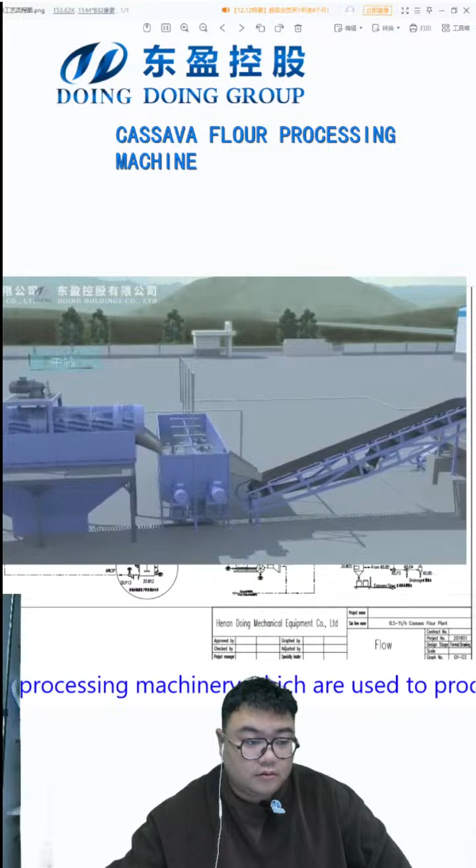Each equipment one by one.

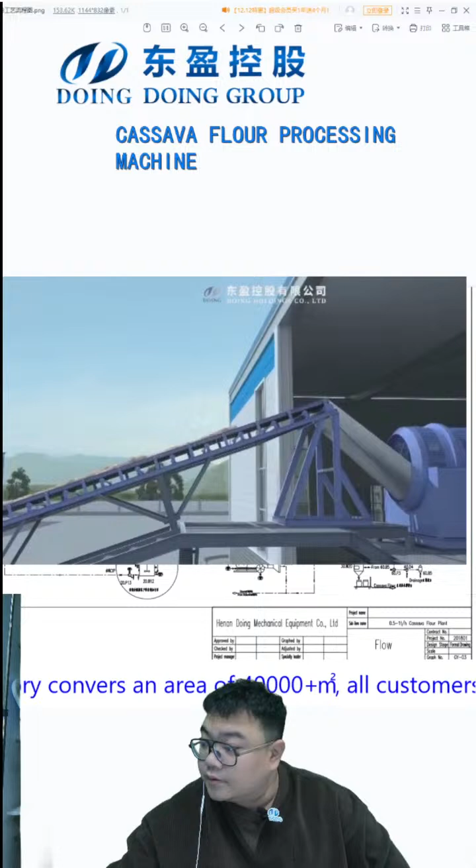First we take the forklift to take all the cassava into the hopper, and the shaking will shake the cassava separately to the belt conveyor, and the belt conveyor will take the cassava to the next step, the dry sieve, because after we harvest the cassava, it will bring some grass or rock.

This step takes these things down, and then it goes directly to the paddle washer to move the soil and the other dust out. And we can see here the paddles shaking and pushing the cassava to the next step, and the water is different with the cassava flow.

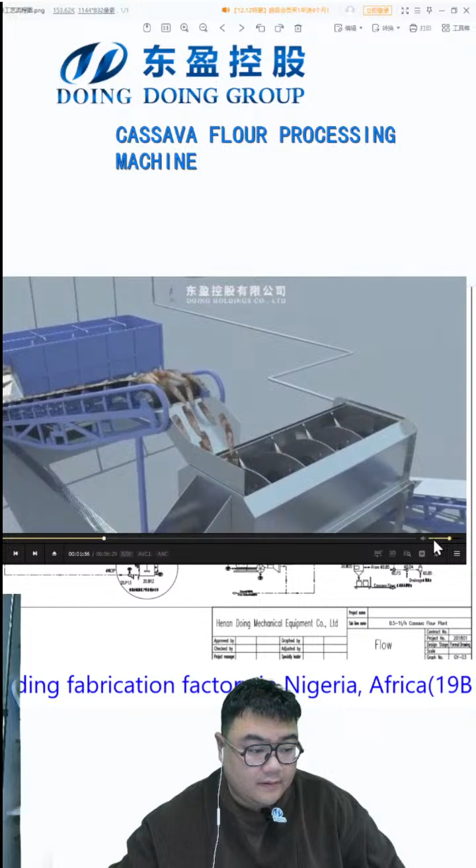For the cassava, it will wash it very clean, and then go to the peeling machine. The peeling machine is very important for the cassava flour. Once you take all the inner skin and outer skins out, the quality of the cassava flour will be very good.

And then after the peeling, the cassava will go to the cutting machines to break into small pieces, easy for the rasper. And then we use a pump to pump all the cassava to the desanders, because sometimes the soil is very thick. We need to move the soils out and make the quality better for the cassava flour.

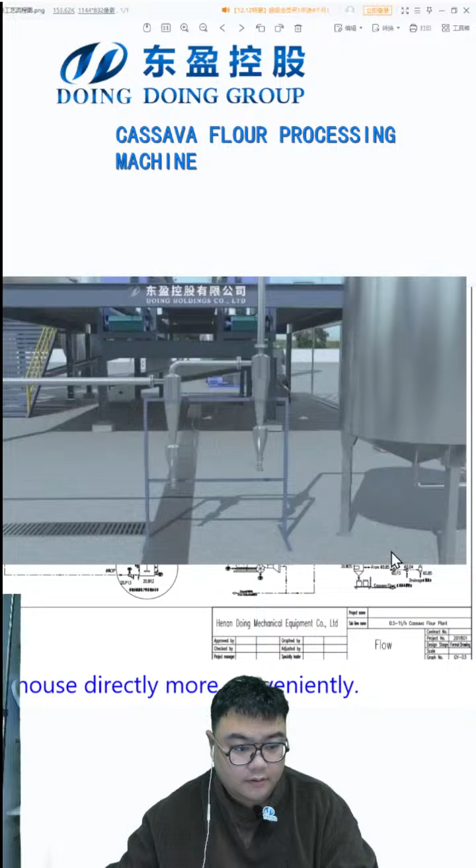And you can see in the tank there is a stirrer. It keeps stirring, so it will not make any harm to the process. And then we use a pump to push all the cassava to the plate filter, and then to push the water out.

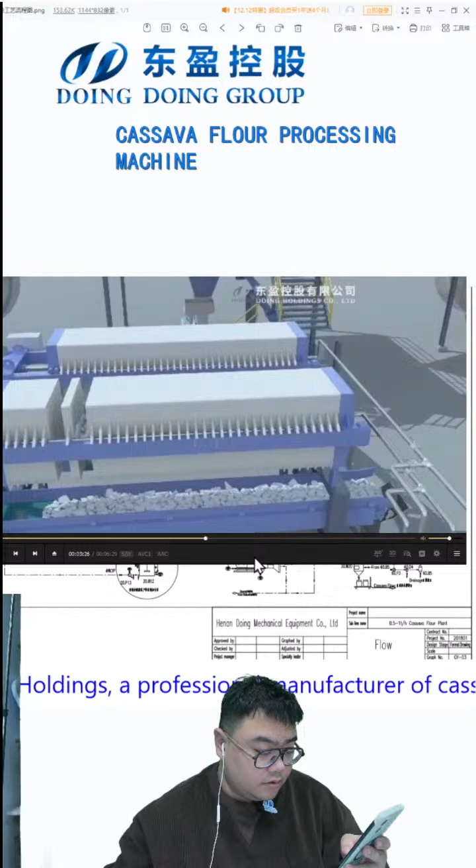The moisture for this one will go to around 42 to 45%, and then we go to a breaker, because after the plate filter the cassava will be stuck together. We just need to break it and go to the flash dryer.

Here's the heat exchanger. The hot air will go from here through all the pipe, and the wind speed is nearly 120 meters. You can see on the video it's very slow, but in actual working, the whole drying time is like 2 or 3 seconds. It's all finished. Then it goes to the cyclone, and downstairs to the shaking sieve.

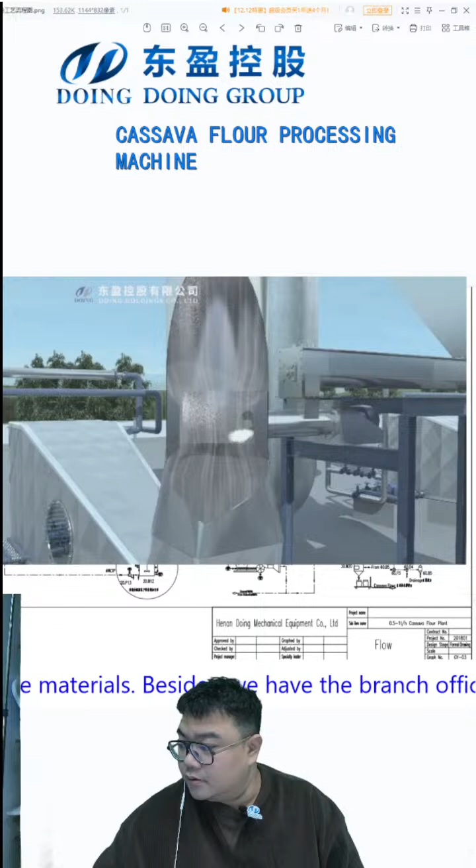For the cassava flour, we use 2 stages of drying sections, because the moisture is higher than usual, because the fiber is not taken out. So we need an extra flash dryer to make it drier, to about 14% moisture, easy for storage. And then it goes to the cyclone and to the sieving.

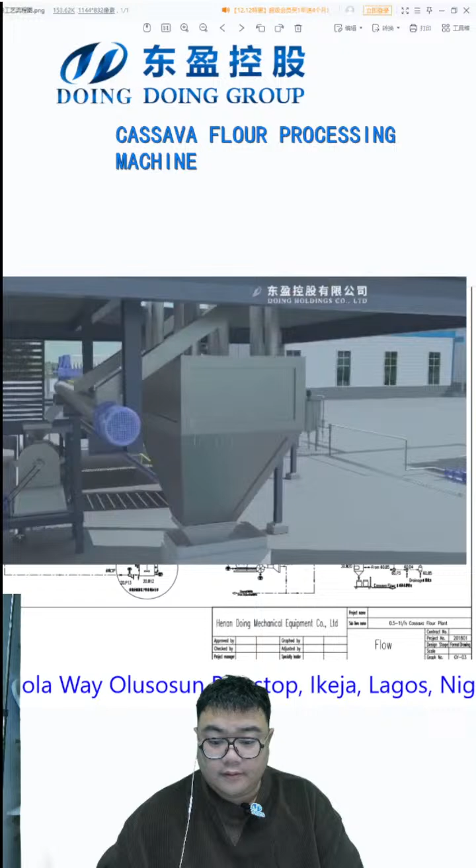After the sieving, we have the semi-automatic packaging machines. The only thing we need to do is put the bag on and do the settings. It's easier to do the job. And once we do the sieving, the bigger particles will go back to the milling machines to make them finer and be packed again.

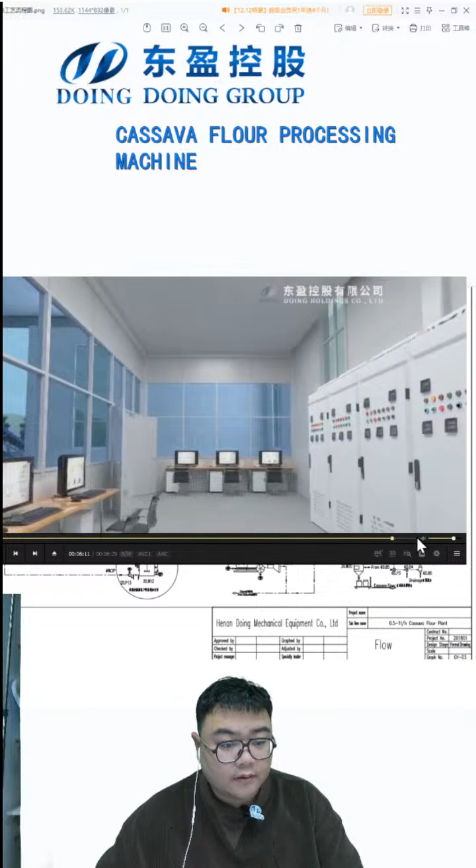And you can see the pipe here. And this is the PLC control room. You can see here the computer which can control the whole process, and it's easier to control and to stop all the machines immediately once we have a problem.

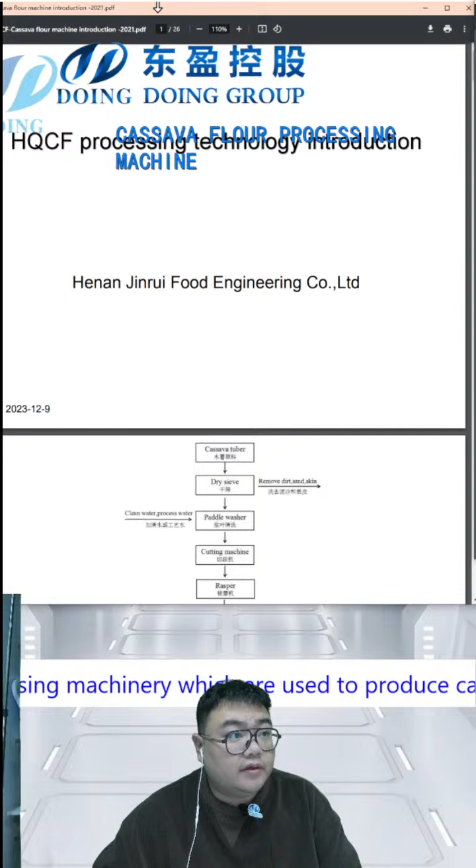Okay, we already saw the videos, so let's begin to see all the things. Firstly is this. We're currently going from here. Let's begin from here. Wait a moment.

Let's begin with the flowchart. Firstly, we need the cassava tubers, and put them into the dry sieve to remove the dirt and some of the skins, because we both know cassava has two skins. One is the thicker skin, one is the inner skin.

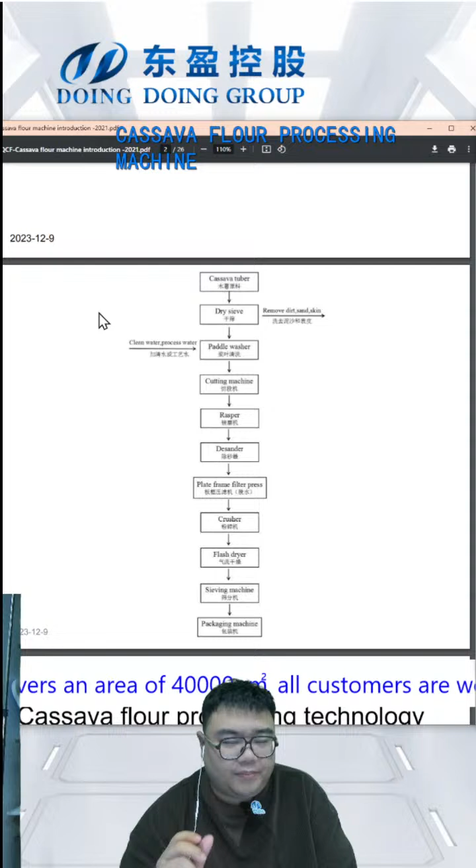For the dry sieve, because we use rollers on the outside of the steel, it will remove part of the skins. So definitely the dry sieve will take out some of the skins, but not all of them. So the next step is the paddle washer.

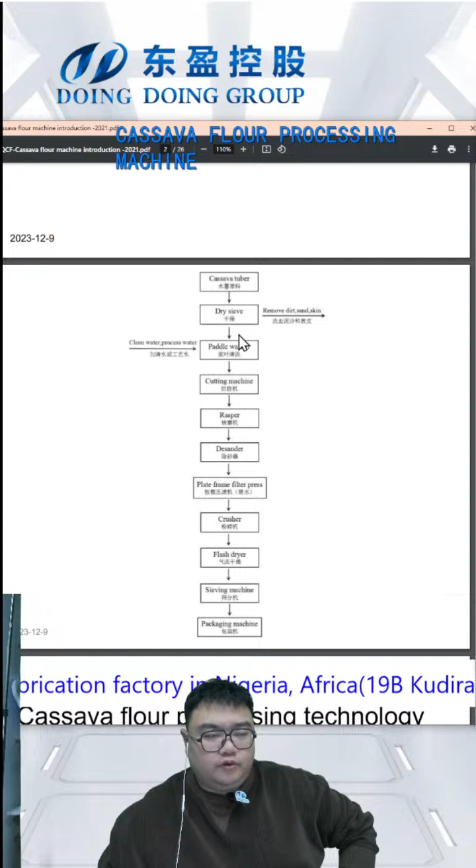We need to add clean water or some of the process water back here to do the cleaning, because when using the paddle washers, some of the water can be recycled, so we can recycle the washing water again, so it does not need too much clean water to do the process.

Second is cutting machines. Because the cassava is too big, and some is this long, we must cut it into small pieces before the machines. Here is before we use the raspers.

Now we suggest using mill machines, because the raspers are more often used in the cassava starch production line. With the raspers, you can destroy as many cells as possible to take the starch out. But cassava flour needs a step to press the water out. If we break too much, the starch will be lost in the plate frame filter process. So here we suggest using a hammer mill, or if the capacity is more, a grating is enough.

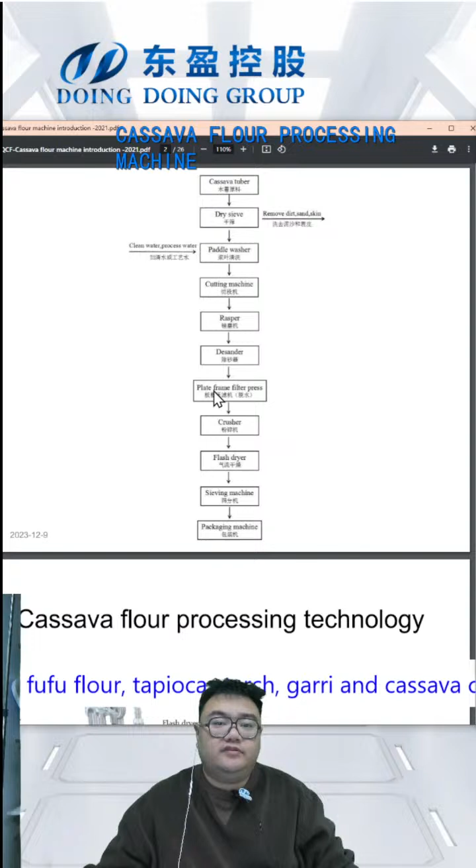After that, it goes to the desander, and there is a pipe from the raspers to the plate frame filter press. In this flow chart, I missed one thing: a middle tank here. After the rasper, it will go to a pool, and after the pool, it will go to the middle tank. The plate frame filter press works flow by flow. We fill one plate and change to another plate, and this machine works maybe about 5 to 10 minutes.

Then we need to send the material to the next step, and it's like wave by wave. So we need a middle tank to send the material to the next step. So a middle tank with a stirrer is important in this step.

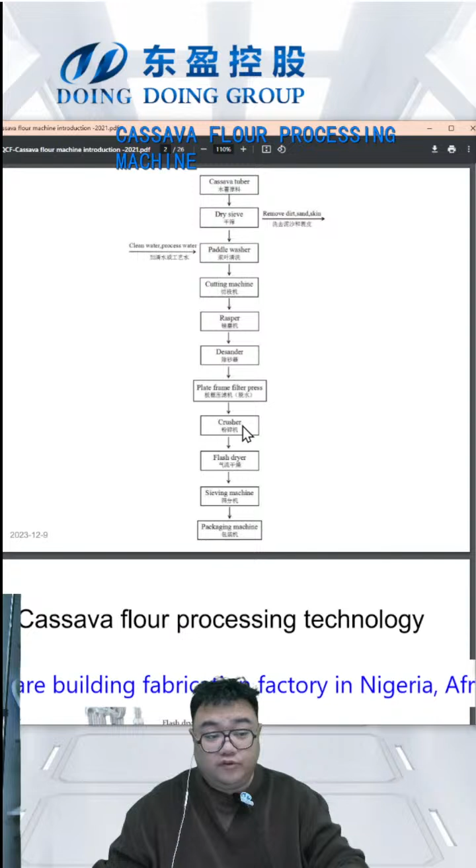Then we go into the crusher, because the filter plate press sticks them together, since we need to press the water out, like squeeze. It will squeeze them together. So we need a crusher or something to break them back to flour, and then put it into the flash dryers to dry it, and then to the sieving machines.

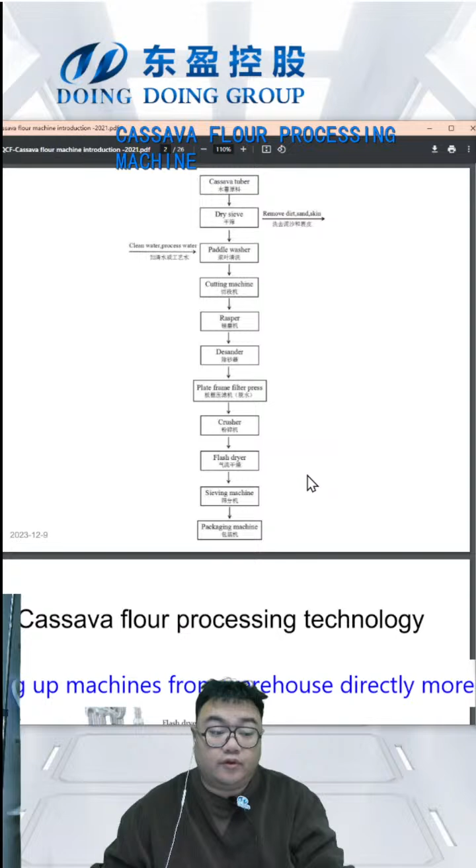Because it's a new step, we suggest putting a fine mill machine here, and before the sieving machines, we mill all the flour. So it will be smoother and finer. Then it goes to the sieving machine to guarantee the quality, and then into the packaging machines. And here is the flow chart and the map.

Here are the feeding hoppers, then a belt conveyor brings it into the dry sieve. After the dry sieve, it automatically goes down to the paddle washer machines, and after the paddle washer machines, we need another belt conveyor to take it up to the cutting machines, which cut it into small pieces, and then into the hammer mill to break it into flour. Then it goes into the middle tank with the stirrer, and after that into the desanders and into the filter press.

And here is another hammer mill. It will break them into flour again, so it's easier to go into the flash dryers. Then the flash dryers and the vacuum machines and so on, and then a fine mill machine, and after the fine mill, to the sifter, and then it can be packaged.

Here we can see the scraper and the belt conveyors. There are usually two kinds of belt conveyors. One is to transport the cassava to the next step when it's not peeled, or after peeled. It's okay, because it's not processed yet. So this kind of belt conveyor is fine.

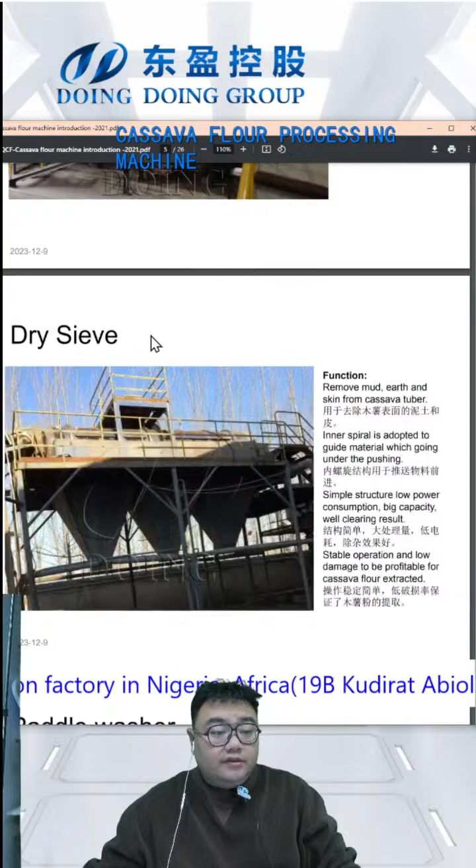So here is the dry sieve. Yes, it removes the mud, earth, and skin from the cassava tubers. And the inner spiral is adopted to guide the material which is going under the pushing. Simple structure, low power consumption, big capacity, and good cleaning result. Stable operation and low damage, profitable for cassava flour extraction.

So it's something like this. You can see here. Here is the address.

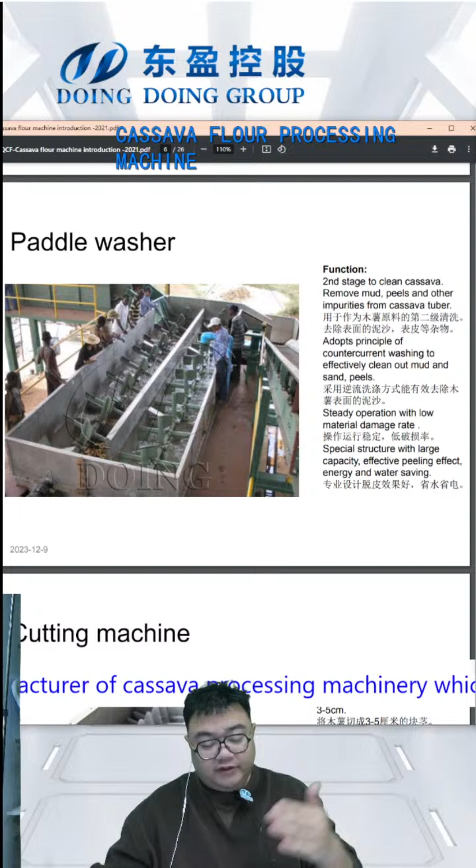It's something like this. Maybe you don't understand, because the water is going this way, and we're using a paddle to push the cassava to go from here, but our water is from the top to the end, so this way is called countercurrent. So it's easier to take the mud and other things out because it's serving one more force. And steady operation with low material damage rate.

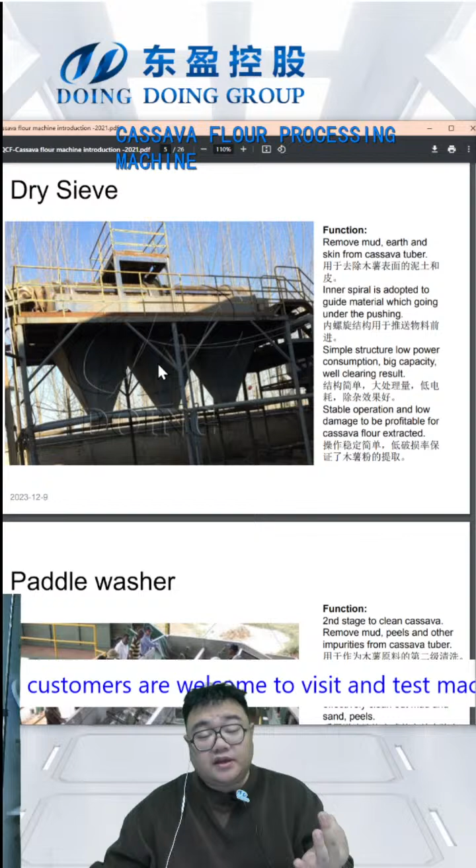Because here we also take out some smaller things like stones, because at this step some bigger stones may stay with the cassava to the next step, but when it goes to the paddle washer, the stone will go down and the cassava will go up, so it's easier to take them out. And special structure with large capacity, effective peeling effect, energy and water saving.

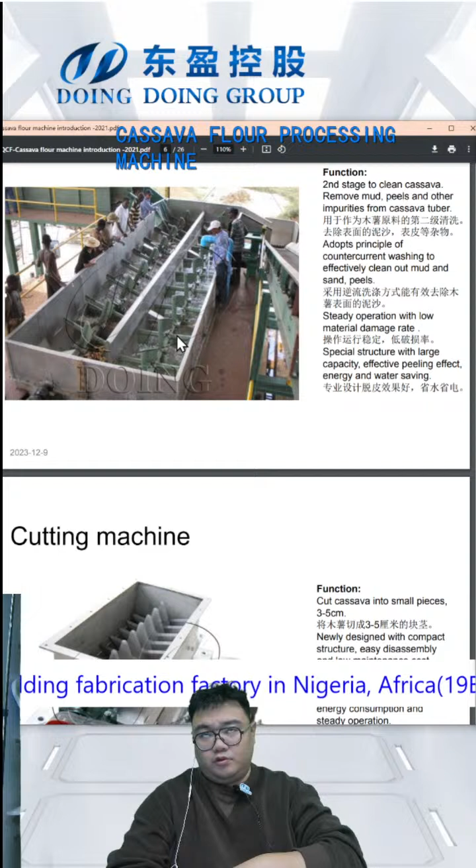So for this kind of peeling machine, capacity is from 1 ton to nearly 5 tons. Maximum is like 5 tons. If more than 5 tons, we need to combine the paddle washers. No, I mean, sorry, it's like 10 tons. The paddle washer is not a big deal. It doesn't have a capacity limit, but usually 10 to 20 tons is all fine. I was thinking about the peeling machines.

So there is a peeling machine after the paddle washers. So it's like this. Let me find one thing here. This one is cassava right here. What?

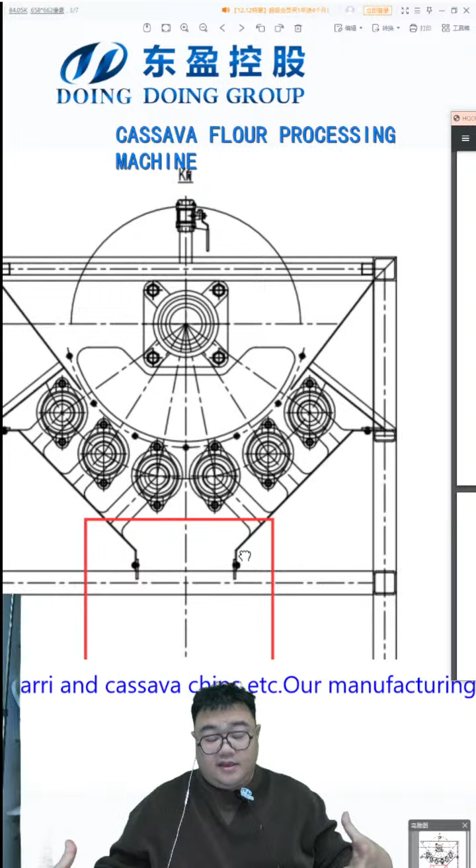When the cassava touches this, and the skin is smashed off, it will go down from here, and you can put something like bags here to take the peel, so you can dry it and break it and make animal feed. So it's another use.

And here is the water pump. We take the water from here to go inside, and here is a way to switch open and close. And you can see the water is going this way, and going outside from it. So because of the sandpaper with the water, it will be more effective to take the peel out. It's pretty good.

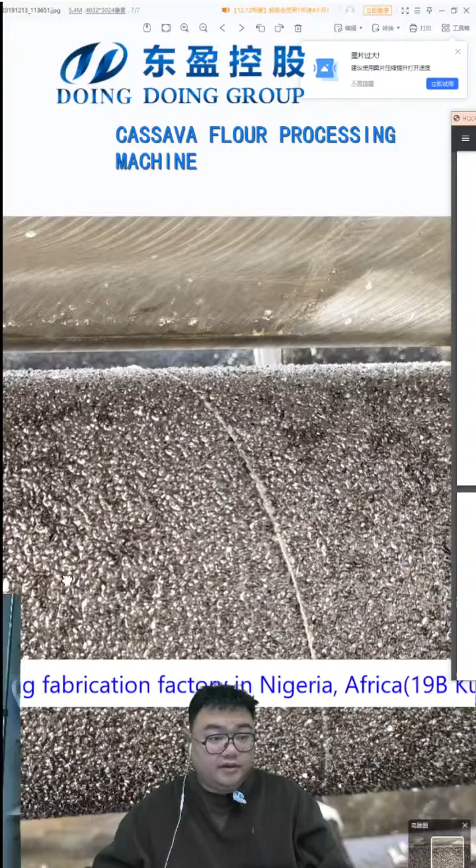So secondly, let me find another map. This is a water sandpaper. You can see it's very rough, so we can definitely take the skins off. Sorry. And here is the sandpaper, and we can go next. Yeah, we can go next.

Here we go to the cutting machines. After the peeling machines, part of them are already peeled, but if we want better quality, we suggest having someone after the peeling machines to check the cassava. If some of the skin is not taken off, we just use a knife to cut that part and throw it back to the peeler again. So after we take all the peel off, we go into the cutting machines and cut the cassava into small pieces like 3 to 5 centimeters.

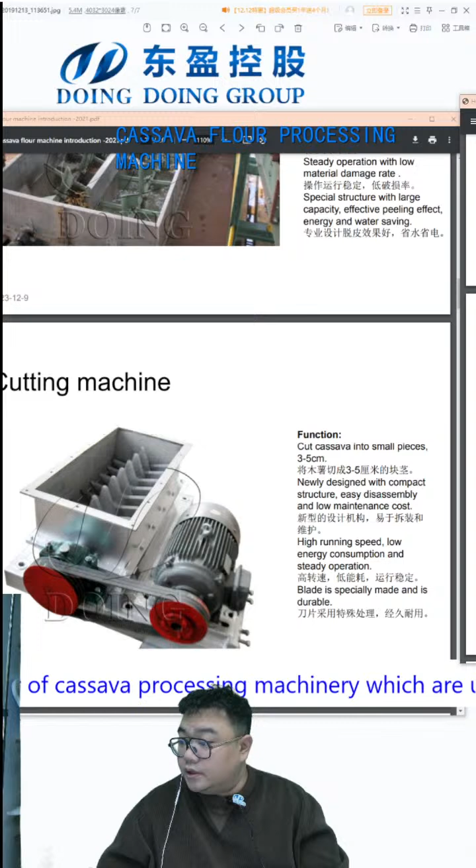It's newly designed with compact structure, easy disassembly, and low maintenance cost. And high running speed, low energy consumption, and steady operation. The blade is specially made and is durable. So let me find another picture for this one. Here. This is the page.

This is the picture of it. You can see here is a big blade inside, and it's called 65Mn, and it's very strong, and it's like a diamond shape, and it will cut all the things into small pieces, cut the cassava into small pieces. And this is the picture for the inner part.

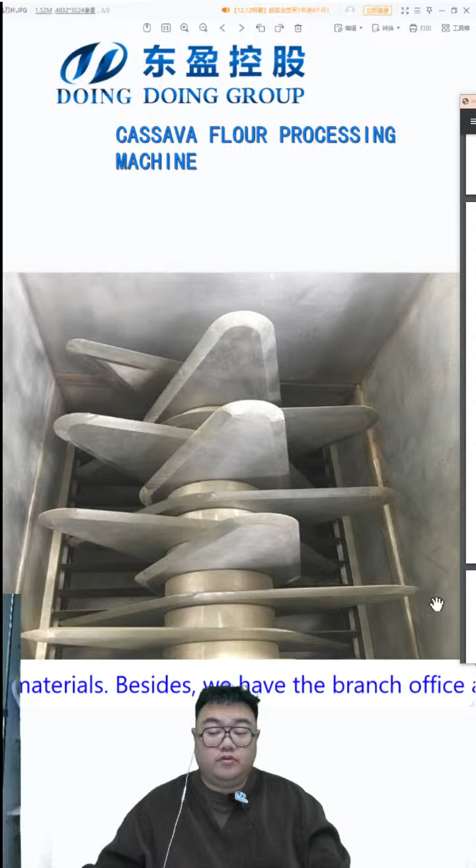Yes, this one. This one is a blade. Inside the blade, you can see it. And when it's more than this, like this big, it will not go down. It will be cut again by the blade. So no need to worry about it, and it will continue going. Okay, let's go to the next step.

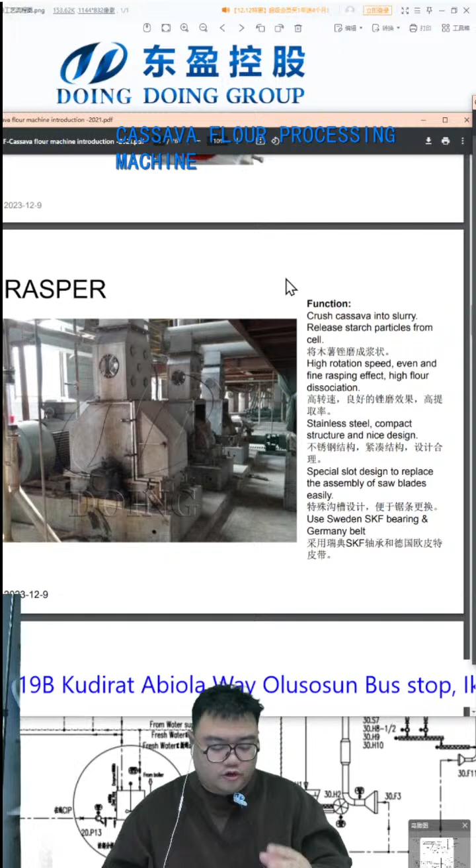Here. After the cutting machines, we go into the rasper, like this. I talked to you before, because the rasper breaks the cell too much, it will bring the starch out too quickly. So my suggestion is using a hammer mill machine to make the cassava flour, and replace the raspers. So let me find a hammer mill machine.

So no need to worry about it, because we do have a second step to do the same thing. This step is only to break it enough to go into the filter plate to take the water out. So for the thickness and all the things, more like the flour, is another duty for the fan mill machine to mill the flour again to that thickness. So no need to worry about the flour things. Okay, let's go to next step.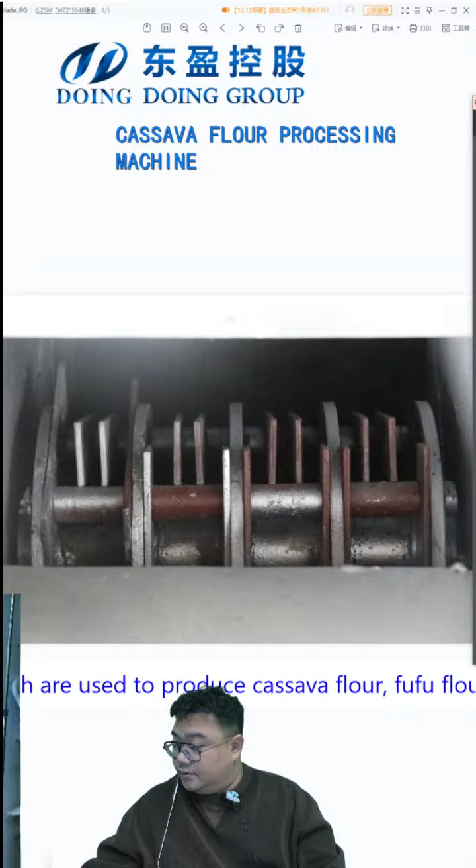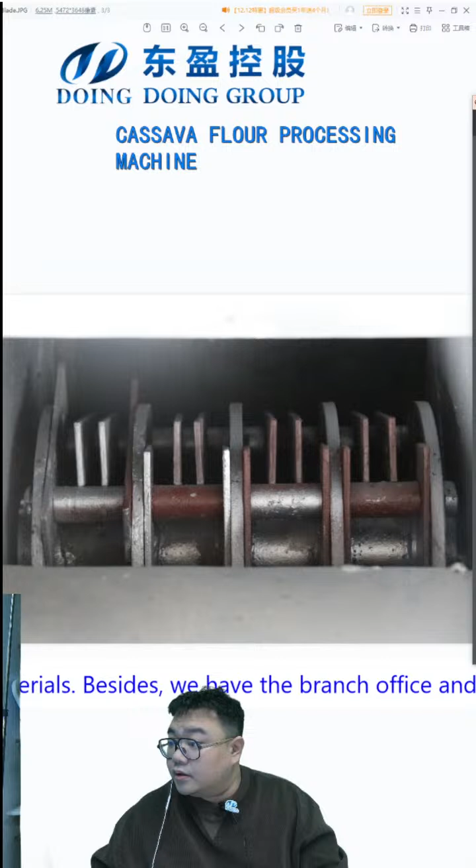To next step. It's more like, it's not like this one. Where is it again? Wait a minute. Let me find one thing. Where is it? Let me open one thing. Yes. Not from here. Yes, from here. Yes, great. We found it.

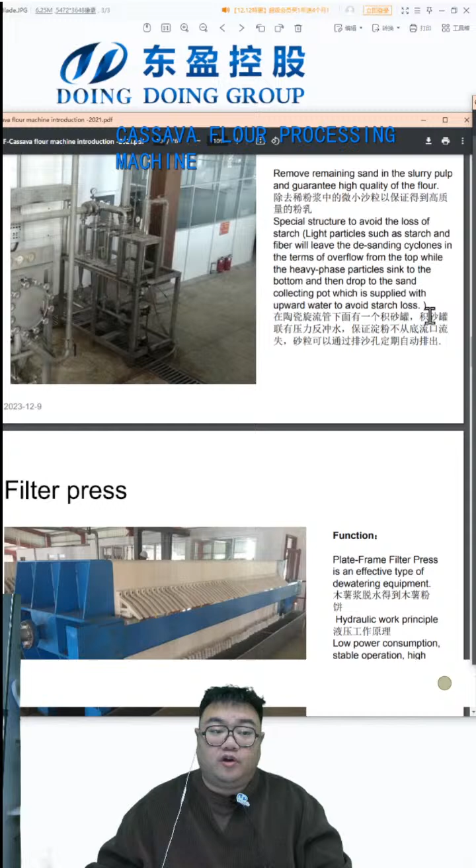So after that, we go to the desander. Remove the remaining sand in the slurry and guarantee high quality of the flour. The special structure avoids the loss of the starch. Light particles such as starch and fiber will leave the desanding cyclones in terms of overflow from the top, while the heavy phase particles sink to the bottom and then drop to the sand collecting pot, which is supplied with upward water to avoid starch loss.

So this is quite simple, and you can see the mapping, the photos in here. Due to the capacity, it will be much bigger. We do see some for the starch. It's like that big, or this big, and this long, nearly 1 meter. So to guarantee the final things.

And then it's going to the filter press. The plate frame filter press is an effective type of dewatering equipment, with hydraulic principles and low power consumption, stable operation, and high starch extraction rate. So for the filter press, you can see here. One plate is 1 by 1. So this is a normal filter press.

So we have another filter press, this one. It's more suitable for much higher quantities. So we bring the air back to this machine. You will see a lot of small pipes down here. They link to the air compressors, and when it's working, the air compressor directly brings the air inside the machine, using both the hydraulic and the air to take the water out.

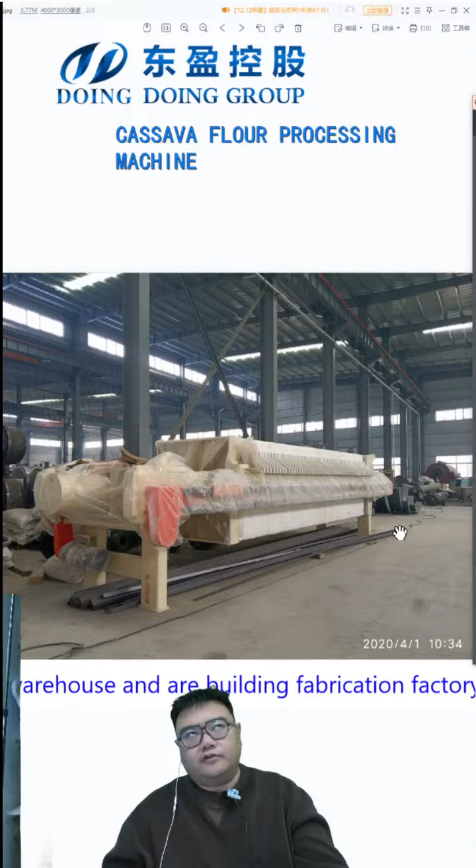So after going through this machine for around 20 minutes, the moisture will decrease to around 39 to 46, something like that. So it will be easier to go to the next step and see the machines. Okay.

And then we can go to the next step.

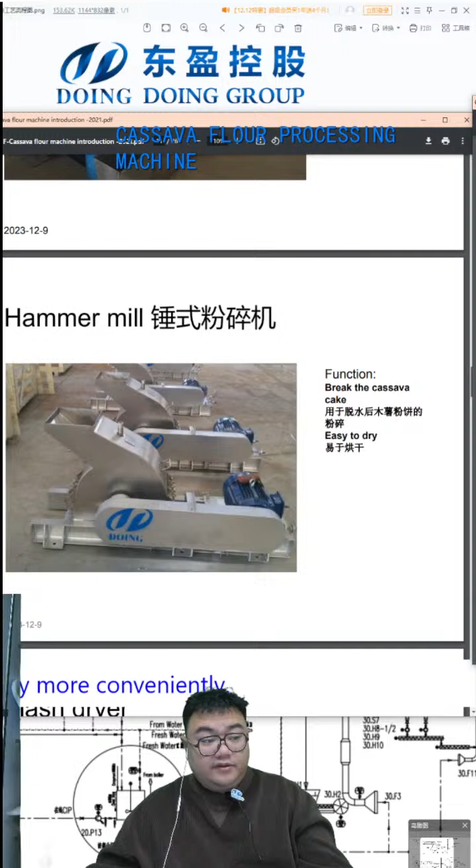I'll go back to this one. After the filter press, this is a hammer mill machine. You can see it, like at the beginning I said to you.

So then we go to the flash dryer. It's impressive that the negative pressure in the whole system works like this, because there are two ways for this pressure system: positive pressure in the whole system and negative pressure in the whole system.

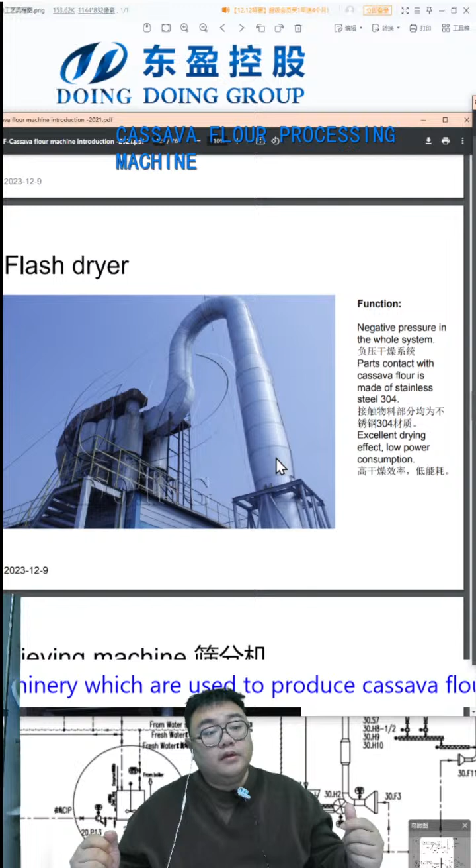The positive is like we take a fan at the top in the beginning and push the air inside, press the air inside. So the air is more inside than outside, so the pressure is higher inside than outside. So the flour, because it's thick, it will go outside because the pressure is higher than outside.

But using a negative pressure in the whole system, we take the fans, exhaust fans, in the back. So we stretch the air from the pipe to make the pressure smaller in the pipe and bigger outside. So the outside air presses the pipe, so no need to worry about the flour going everywhere.

And the parts in contact with the cassava flour are made of stainless steel 304.

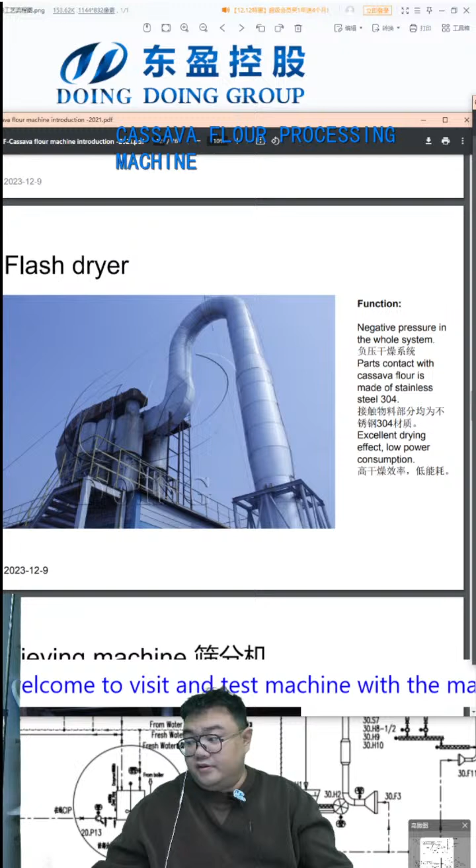You can see after working, it's shaking very hard to help the flour go down, and it will be much better for this.

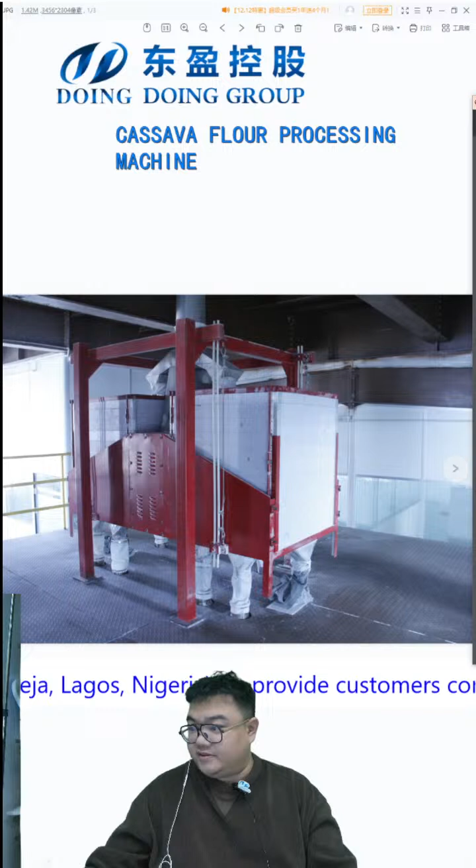And you can see the other pipe here. It's linked here and directly linked to the packaging machines, so you can see here.

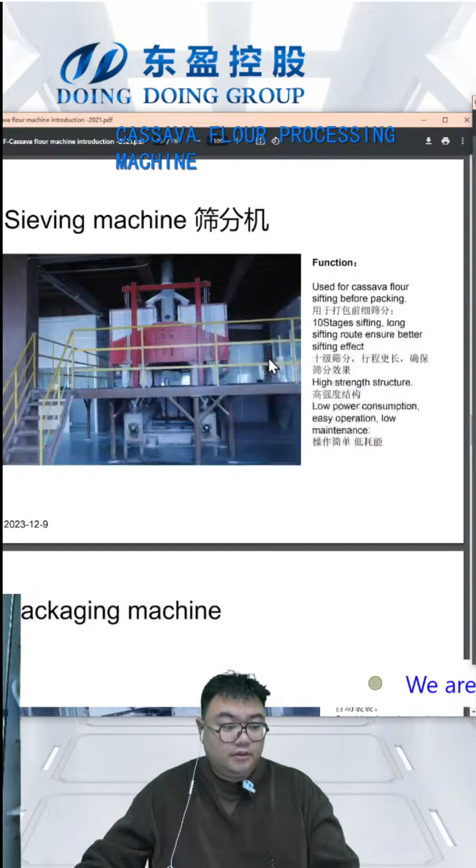It's running stable and easy to operate, monitoring the whole workshop production state. So the PLC looks like this, and it will show each of the temperatures.

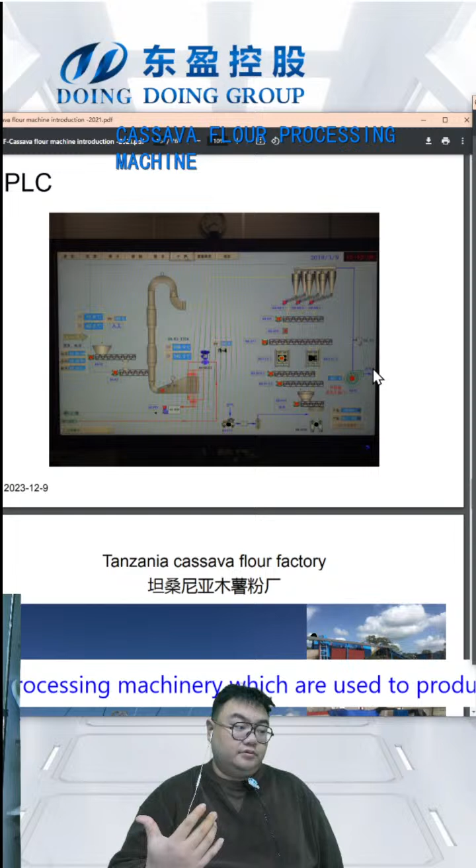If we have enough sensors, we can show all the details on the computer. You can control it directly from the computer to start or stop all the machines. It's very good, making it much easier for the engineer to control the information for all the things.

And here is the Tanzania cassava flour factory. You can see here the details for each of the steps. This is a filter plate press, and this is the sieving, and this is a Chinese potato starch factory in the local area. These are some of the projects we've done before.

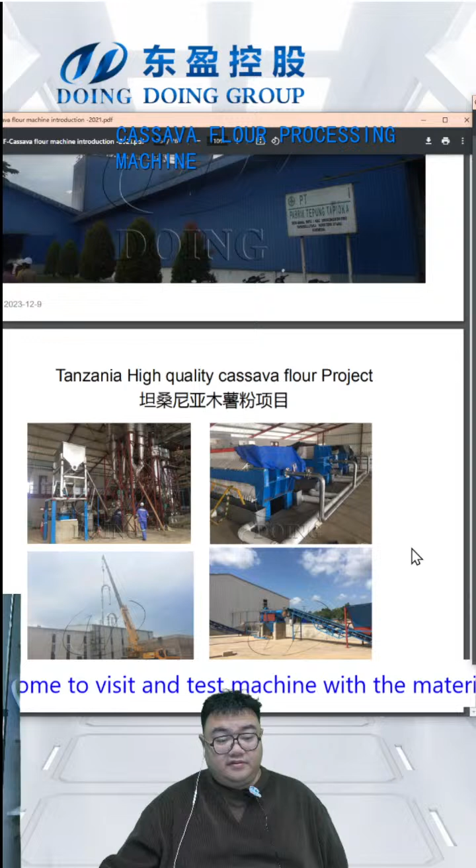This is the most important part for the cassava flour project line, because the pipe for the flash dryer is nearly over 19 to 20 meters high, so we must use something like this to take it inside.

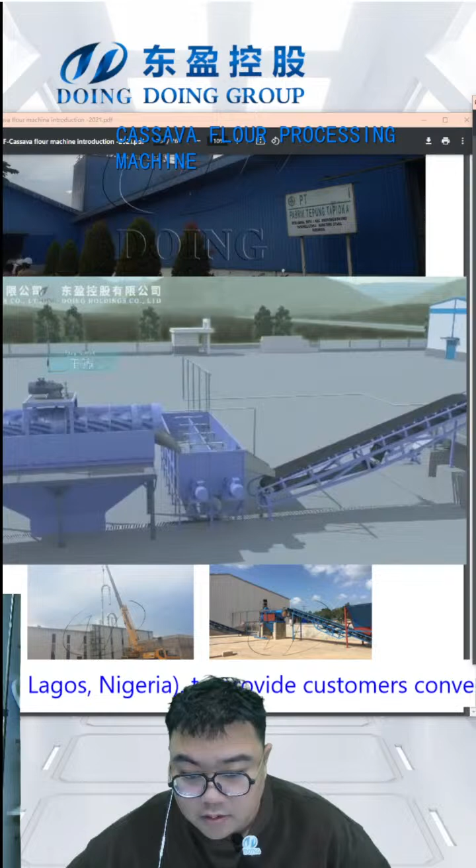Hey, this is Floyd Cui from Doing Holdings. Today, I'll introduce you to the cassava flour production lines. This is the basic equipment for all the machines for cassava flour production, and just to have an overview of all the equipment, and then we'll describe each piece of equipment one by one.

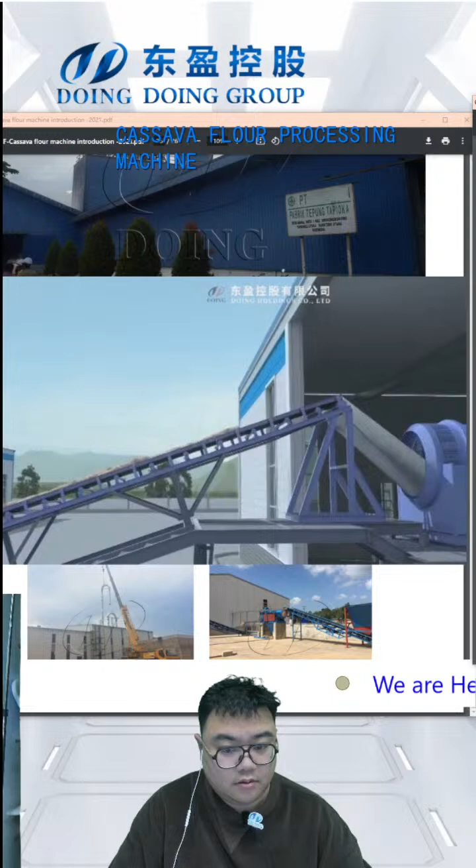First we take the forklift to take all the cassava into the hopper, and the shaker will shake the cassava separately onto the belt conveyor. The belt conveyor takes the cassava to the next step, the dry sieve, because after harvesting the cassava it will bring some grass or rocks. This step removes these things, and then it goes directly to the paddle washer to remove the soil and other dust.

Here we can see the paddles shaking and pushing the cassava to the next step. The water is separated from the cassava. The cassava is washed very clean, and then goes to the peeling machine.

The peeling machine is very important for the cassava flour. Once you take all the inner skin and outer skin out, the quality of the cassava flour will be very good. After peeling, the cassava goes to the cutting machines.

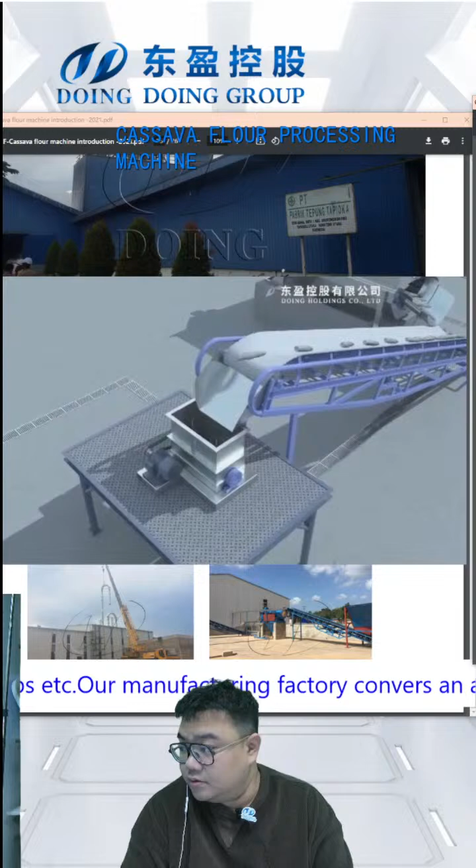The cutting machines break the cassava into small pieces, making it easier for the rasper to process it into starch, making it very thick. Then we use a pump to pump it to the next stage.

It goes to the desanders, because sometimes the soil is very thick. We need to remove the soil to make the quality better for the cassava flour. You can see the tank has a stirrer, which keeps stirring for the cassava flour.

I think in Russia there's more interest in potato starch production lines or something like this.

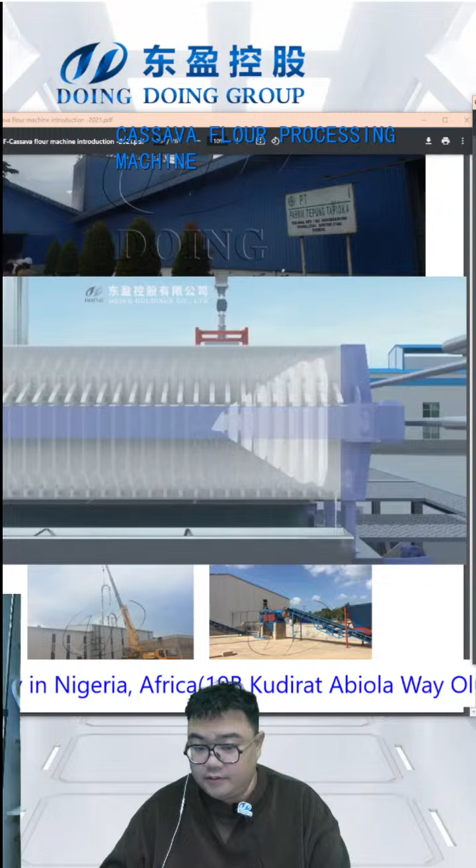This doesn't make anything hard for the process. Then we use a pump to push all the cassava to the plate filter, and then push the water out. The moisture for this stage will go down to 42 to 45%, and then it goes to a breaker, because after the plate filter the cassava will stick together. We just need to break it up and send it to the flash dryer.

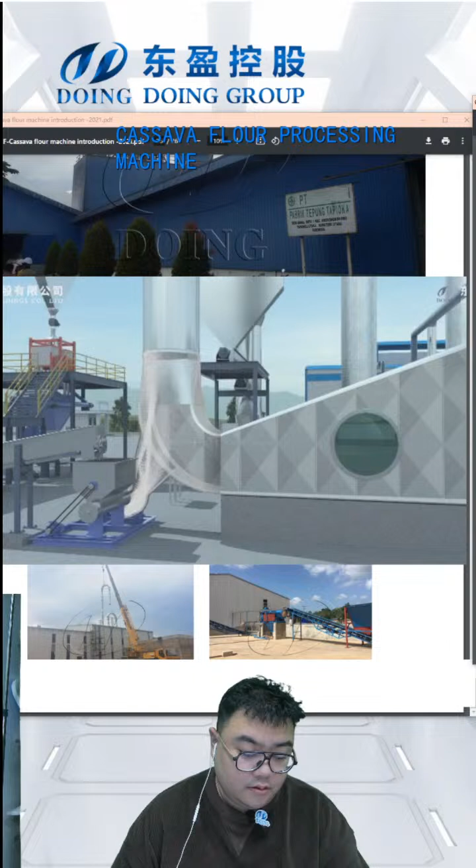Here's the heat exchanger. The hot air goes from here through all the pipes, with a wind speed of nearly 120 meters. So you can see in the video it looks slow, but in actual working conditions, the whole drying process takes only 2 or 3 seconds.

It's all finished, and it goes to the cyclone, then downstairs to the shaker, to the sieve.

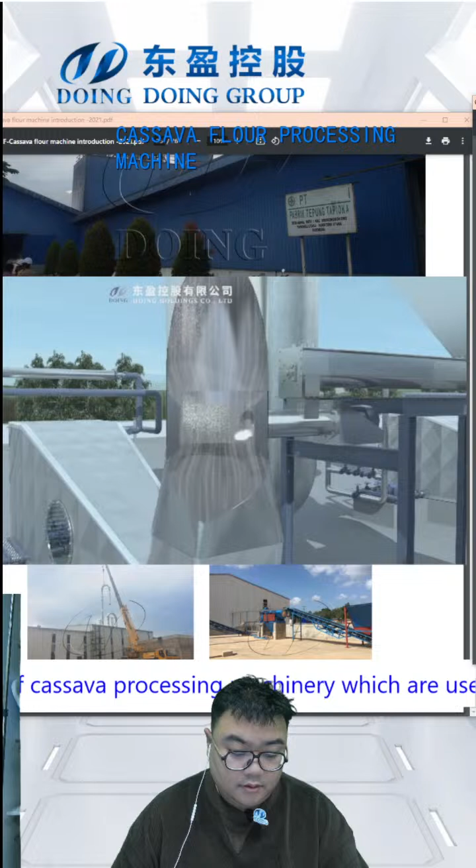For cassava flour, we use 2 stages of drying because the moisture is higher than usual, since the fiber is not taken out. So we need an extra flash dryer to make it drier, down to about 14% moisture, for easy storage. Then it goes to the cyclone and to the sieve.

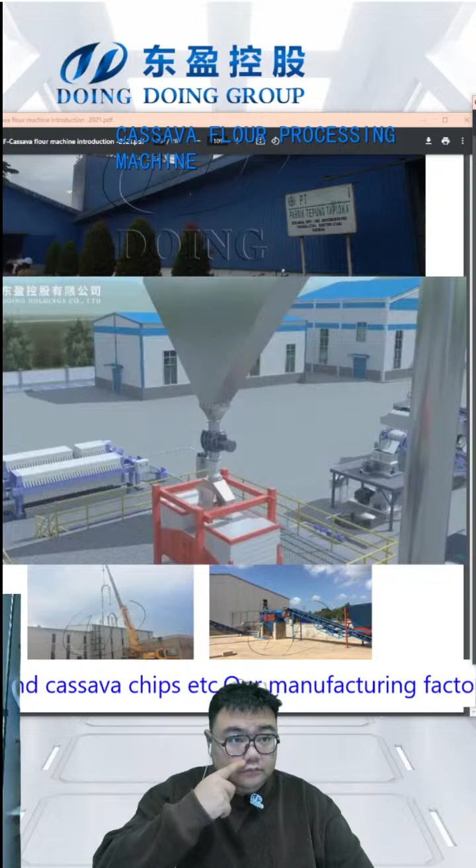After the sieving, we have the semi-automatic packaging machines. The only thing we need to do is put the bag on and do the sewing. It's much easier to do the job this way.

Once we do the sieving, the bigger particles go back to the milling machines to be made finer, and then get packed again.

You can see the pipe here, going back with the plate, and this is the PLC control room. You can see the computer that controls the whole process. It's much easier to control and to stop all the machines immediately if there's a problem.

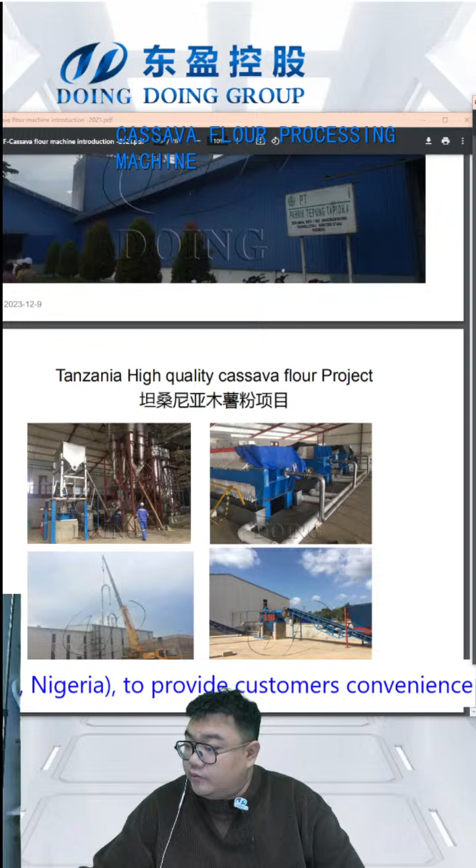So it's like this, I will try to find some pictures for a project we've done before for a cassava flour project, so we can see some of the machines and other things. Let me find it for you, just wait a minute.

It's kind of like this, yes, something bigger, and these are the installation photos. Let's go and check this one, it's a cassava flour project. This is also a cassava flour production line we've completed the installation for, just finished.

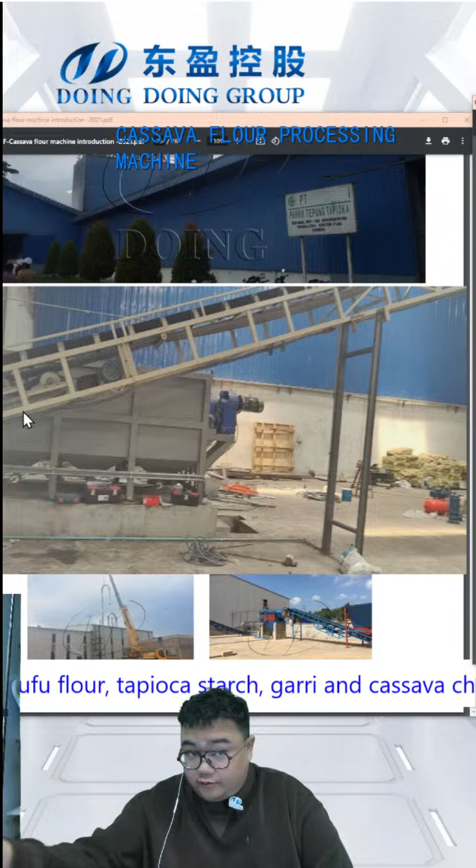We make a cover and cover it. So once the cassava goes into the cutting machines, it will not go outside, because the blade is too strong and it will smash something out if we don't put a cover on it.

Firstly, we put a cover on it, and secondly, it protects so it's not going outside. And here goes down here, there is a conveyor. You can see the conveyor, and here are raspers. Because this project is doing both fufu and cassava production lines, we can find you one of them.

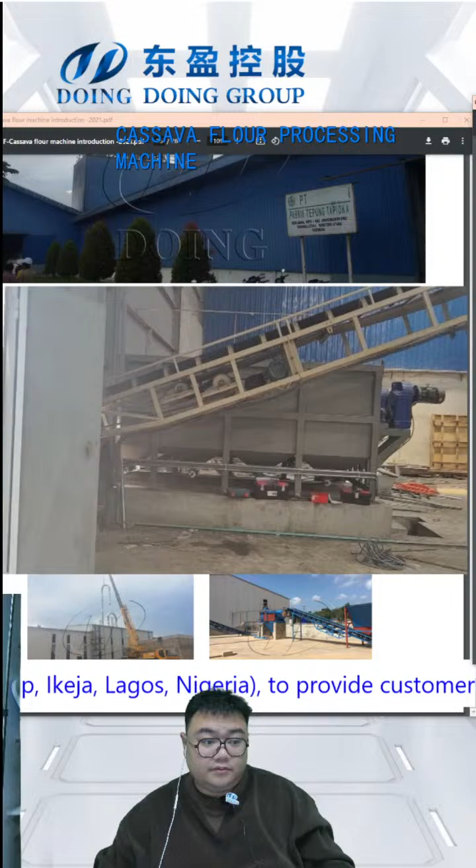Yes, it's here, this one. I've seen it plenty of times. Not here, this one, I've seen this one plenty of times. Because this one is... let me show this one. Okay, you can see here, you can see all the things. Okay, here we go, we can find another one.

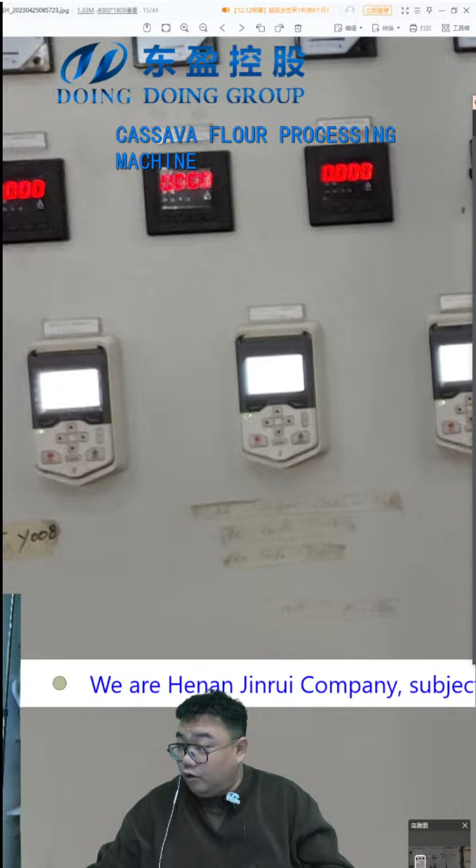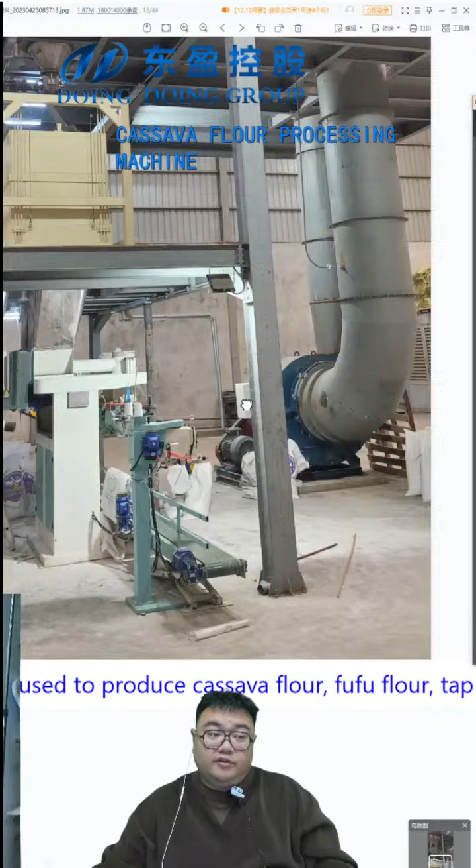So if some of the machines... because this is a very old project, so after now we are already updating. We are just watching the workers do the job, because we need to do a lot of adjustments.

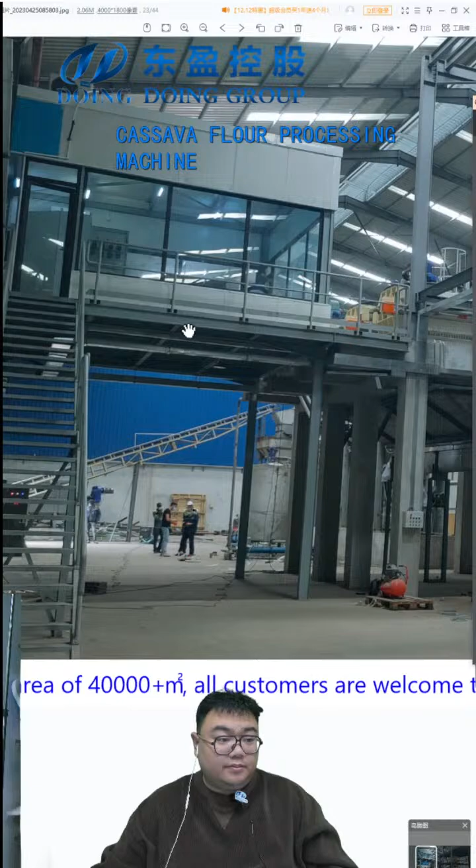Here you can see this is the filter plate press, and here goes upstairs. We can see the computer is down here and controls all the things.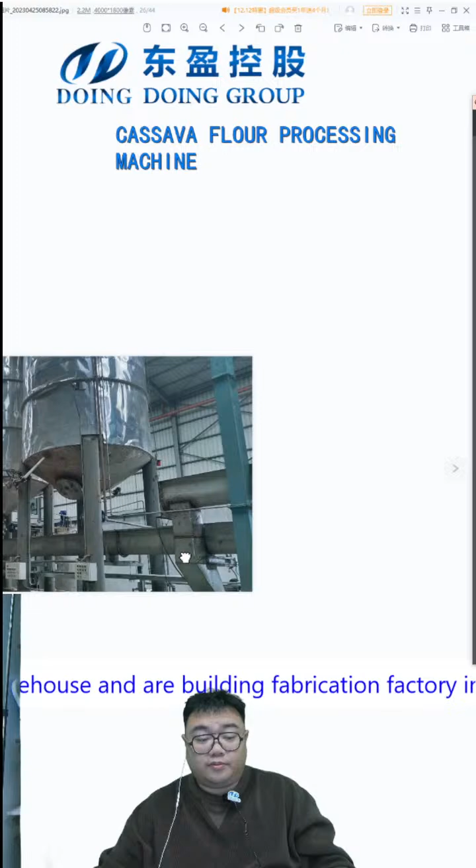And this is also the flash dryer, and it's a screw pump. And it's another... it's something like this, because this full tank is for the fermentation, and we put the fermentation inside of this, and then it can ferment for about 2 or 3 days, and then go downstairs and do the processing again. So it's for the fufu only.

So for the traditional cassava flour, you don't need to do the fermentation. We suggest that after we break it into small pieces, then bring it back here to do the processing.

And here is where we do the installations and the same things. This is the engineer hand, with me, going to do the installations. We stayed in Kinshasa for 3 months and did the whole installation, commissioning, and all things.

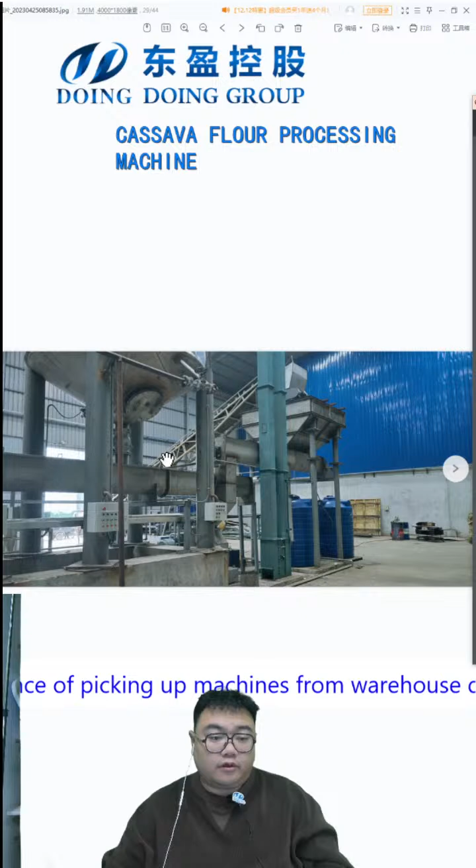And this is a boiler to supply the heat to the flash dryer and then do things. There's some workers adjusting the things. Yes, here it is.

This is just a through pump to adjust the boilers. Because all the machines are made by man, there will be some slight problems, but after we adjust them locally, it will run properly and smoothly. So no need to worry about all things.

And we are taking the plate and taking this paper to each of the plates to guarantee the water will not go out too much.

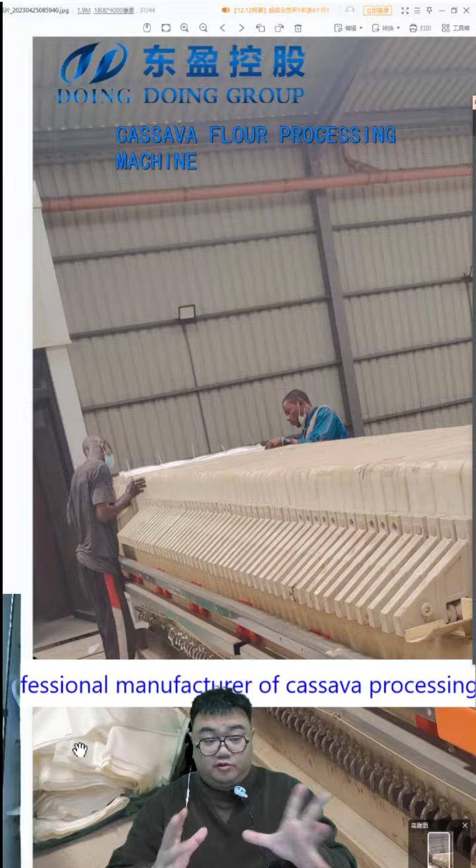Okay, here we go, and we can see this one again. This is the 3D video.

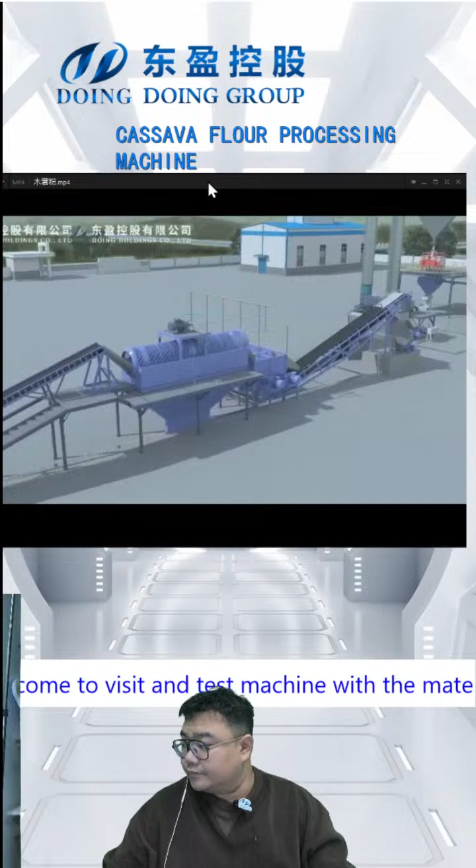Holdings, today I introduce you to the cassava flour production lines. This is the basic equipment for all the machines for cassava flour production. Just to have an overlook of all the equipment, and then we will describe each piece of equipment one by one.

And first we take the forklift to take all the cassava into the hopper. And the shaking will shake the cassava separately to the belt conveyor, and the belt conveyor will take the cassava

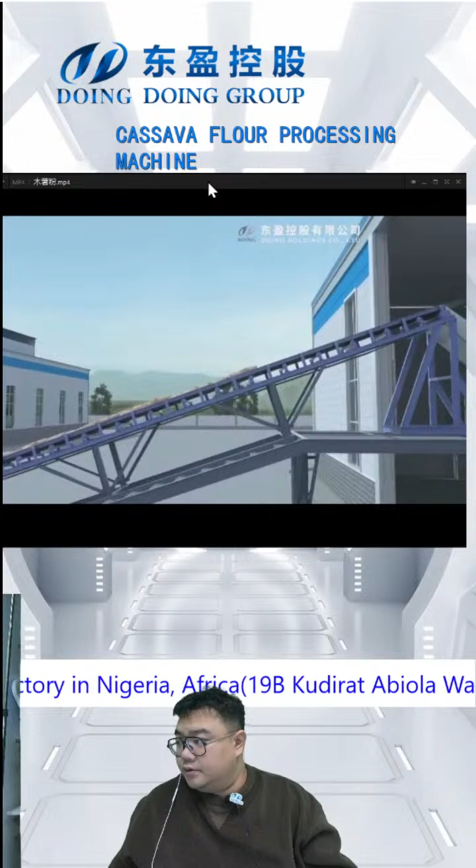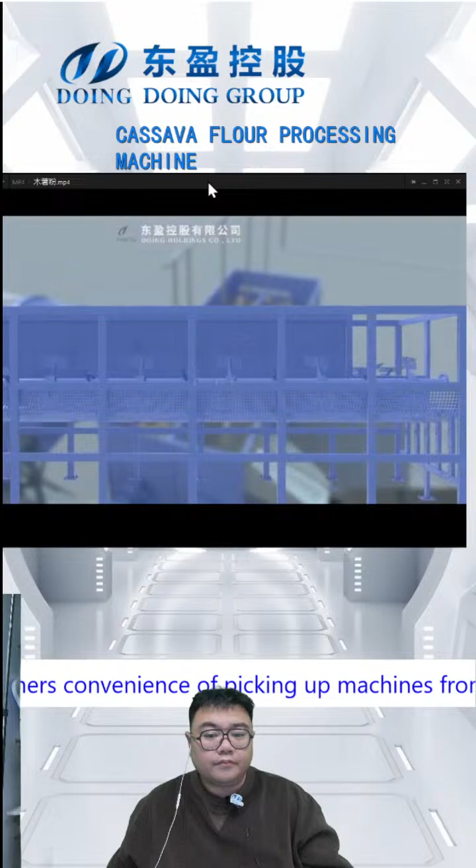and then directly go to the paddle washer to move the soil and the other dust out. And we can see here the paddles shaking and pushing the cassava to the next step. And the washer is different for the cassava flour. For the cassava, it will directly wash it very clean, and then to the peeling machine.

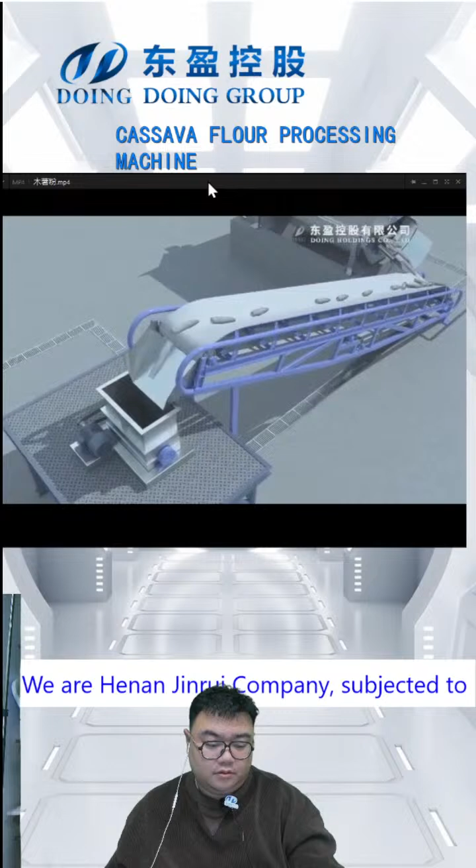The peeling machine is very important for the cassava flour. Once you take all the inner skin and outer skins out, the quality for the cassava flour will be very good. And then after the peeling, the cassava will go to the cutting machines to break into small pieces, and easy for the rasper to make it very fine.

And then all the cassava we use a pump to pump to the desanders, because sometimes the soil is very thick. We need to move the soils out and make the quality better for the cassava flour. And you can see in the tank, the tank has a stirrer. It keeps stirring for the cassava flour, and for the cassava, it will not make any harm for the process.

And then use a pump to push all the cassava to the plate filter, and then to push the water out, and then the moisture for this one will go to like 42 to 45%, and then we go to a breaker to break, because after the plate filter the cassava will be stuck together. We just need to break it and go to the flash dryer.

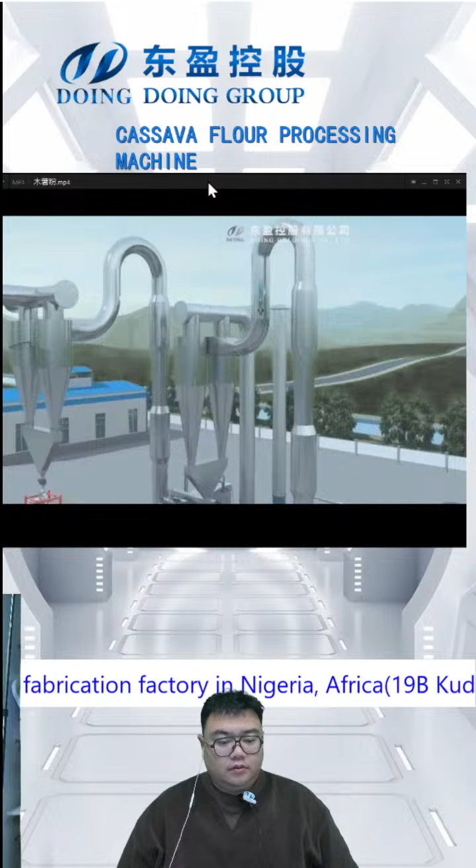Here's a heat exchanger. The hot air will go from here and go through all the pipe, and the speed of the wind is nearly 120 meters. So you can see on the video it's very slow, but in the actual working, the whole drying system time is like 2 or 3 seconds. It's all finished. And it will go to the cyclone, and go downstairs to the shaking, to the sieve.

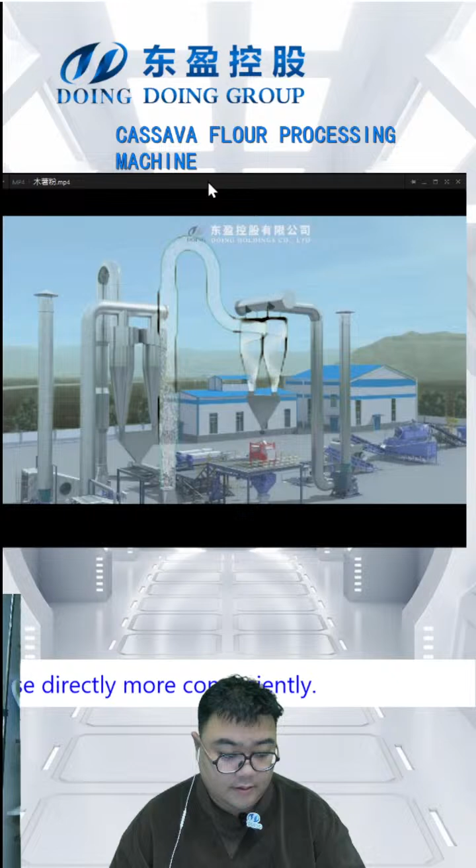And for the cassava flour, we use 2 stages of drying sections, because the moisture is higher than usual, because the fiber is not taken out. So we need extra flash drying to make it drier, to like 14% moisture, easy for us to do the storage. And then go to the cyclone and to the sieving.

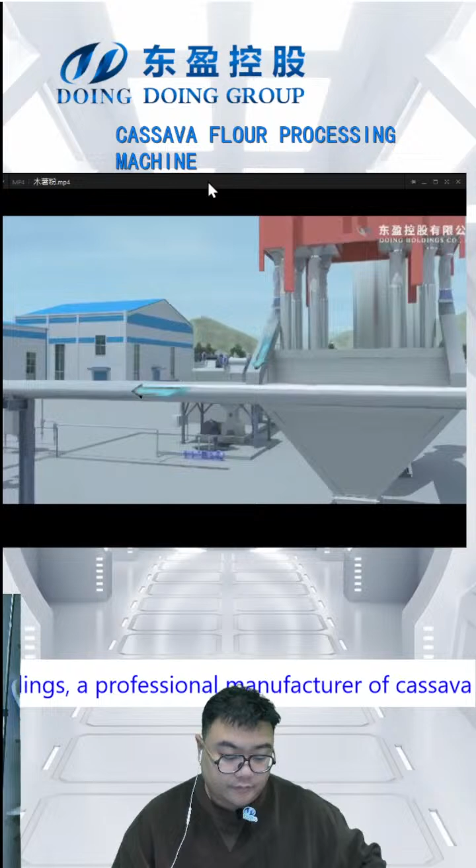After sieving, we have the semi-automatic packaging machines. The only thing we need to do is put the bag on and do the settings. It's easier to do the job. And once we do the sieving, the bigger pieces will go back to the milling machines to be made finer and packed again.